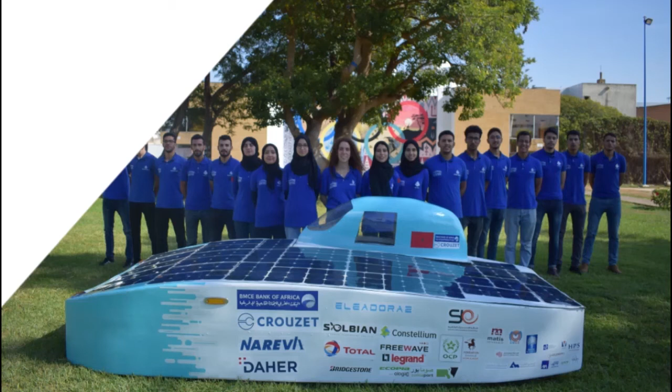Good day, everyone. We are the Rabat Solar Team, a group of 12 Moroccan engineering students from the National School of Mines of Rabat, whose mission is to promote solar energy by making eco-friendly solar-powered cars and honorably represent Morocco in the most prestigious competitions in the world, such as the Moroccan Solar Race Challenge in Morocco and the United Solar Challenge in Egypt. Ever since its creation in 2014, our team managed to design and build 4 solar-powered cars: Eleadora 2, the one in the picture, which is our latest invention and whose name means a gift from the sun, had seen the light in 2019.

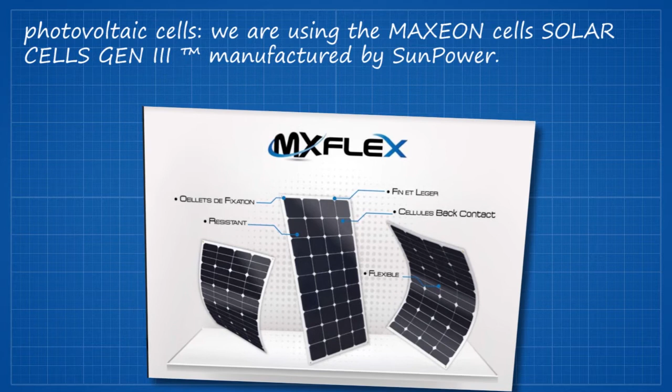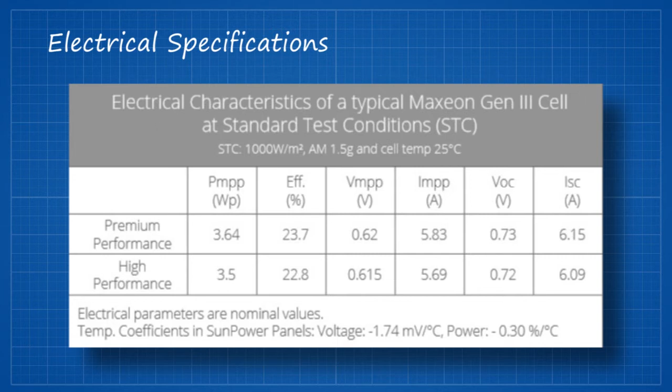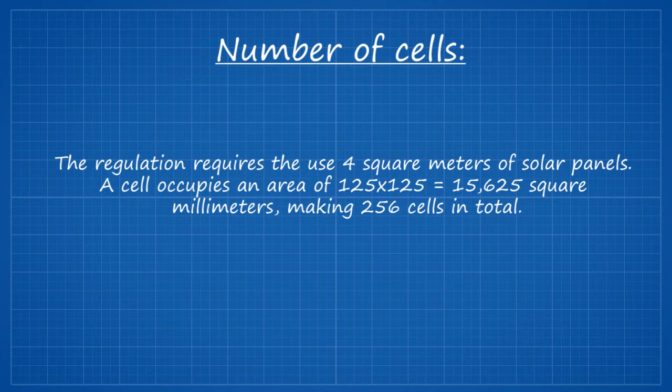Regarding our solar panels, we are using SunPower's third generation Maxeon solar cells owing to their strength, durability, and efficiency. The following figure is a technical drawing of Eleadora 2's solar cells. The electrical characteristic and main reason of our choice could be summarized in the next table, which is primary efficiency. Our car was constructed following specific international competition regulations, which require, for example, approximately 4 square meters of solar panels, and each cell occupies 15,625 square millimeters, a total of 256 cells. The solar panels in our Eleadora 2 are placed as follows.

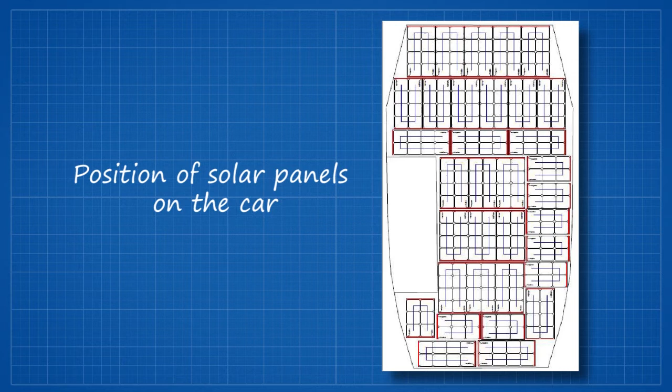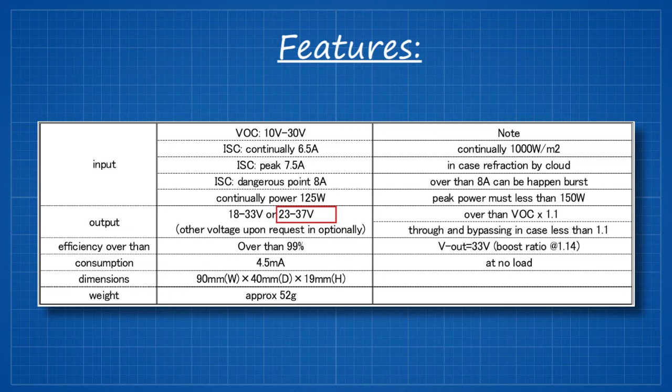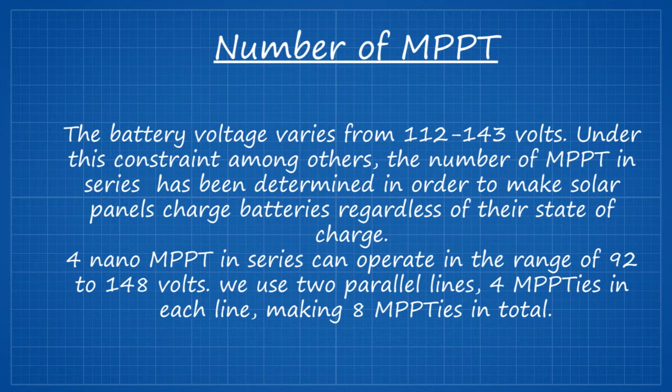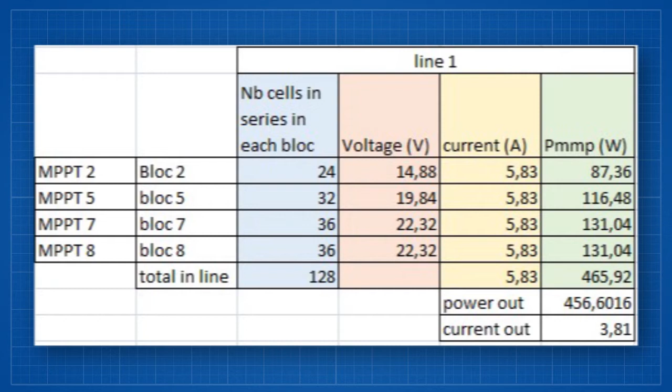Moving to our power tracking technique, we are using the MPPT Nano manufactured by Nomura Giken, type output 23-37 volts, which is specially dedicated to solar race cars. And since the battery voltage varies, we wanted to choose the number of MPPTs in series in order to make the solar panels charge our batteries regardless of their charge state. So we used 4 in series in each line, and since we got 2 lines in parallel, that makes 8 MPPTs in total. The table sums up the entire wiring system for both lines. It shows which block is linked to which MPPT in which line and all the other information on the number of cells in each block.

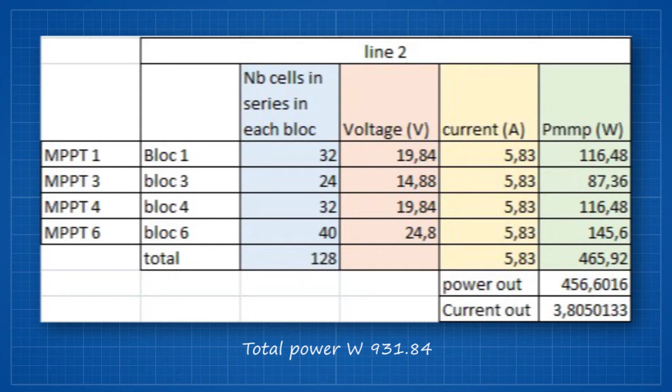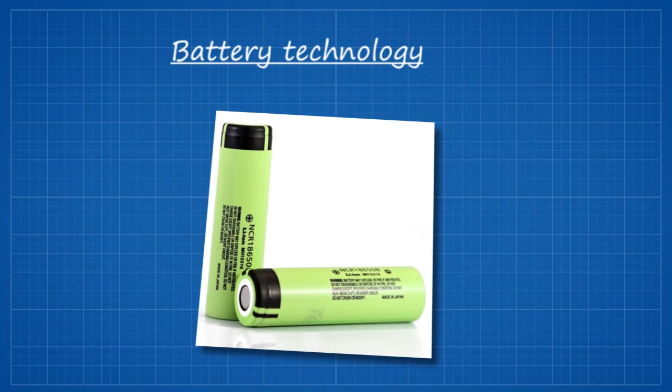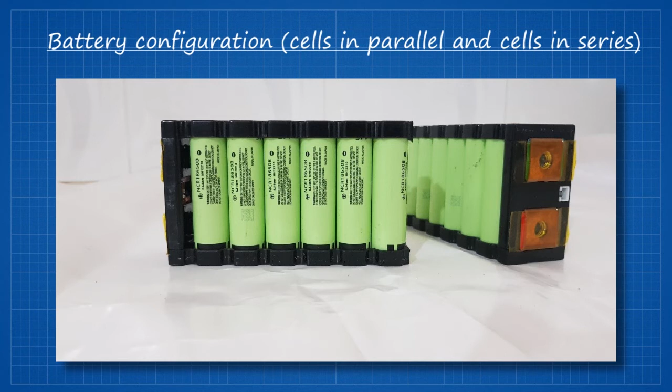Our energy storage system was also designed to respond to the competition rules, which require the installation of a safety system in case of failure and also fix the weights of the battery cells and many more. Here's an extract from the technical regulations that determines the total allowable cells mass in kilograms. As mentioned before, the weight is one of the biggest challenges, so we opted for a technology that offers a maximum gravimetric energy density, that lasts long and that provides a higher voltage. It is the lithium-ion batteries. The weight is determined in our case for 20 kg. However, its main disadvantage is the need for a proper management system to guarantee safety, otherwise the unmanaged cells can catch fire and explode. And here steps in the battery management system.

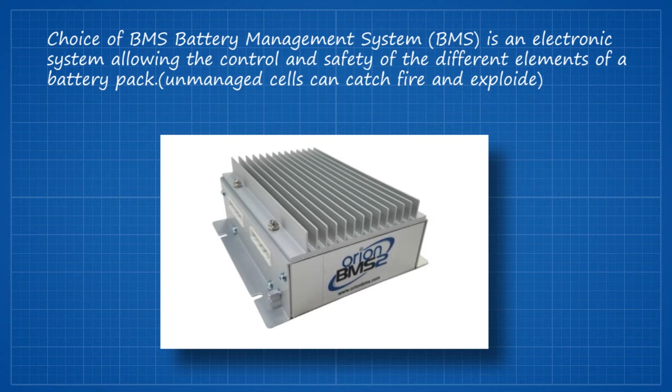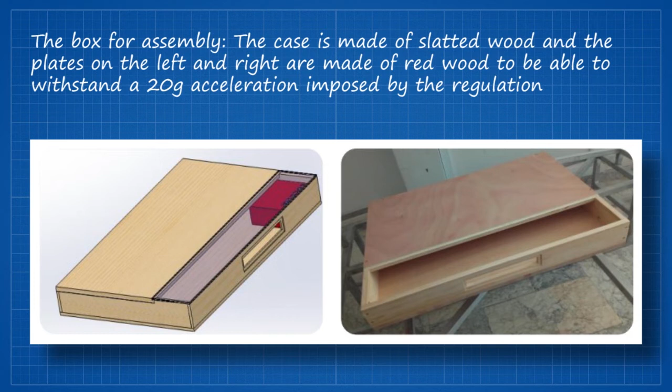Taking into consideration performance, capacity, protection, and ability to manage the high power circuits based on the battery need, we are using the Orion BMS 2 size 36. The box for assembly is made of slatted wood and the plates on the left and right are made of red wood to be able to withstand 20 g acceleration. And here is Eleadora 2's main circuit, and this is our battery pack.

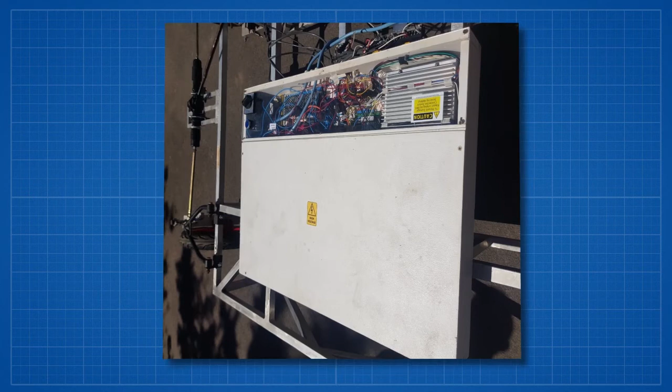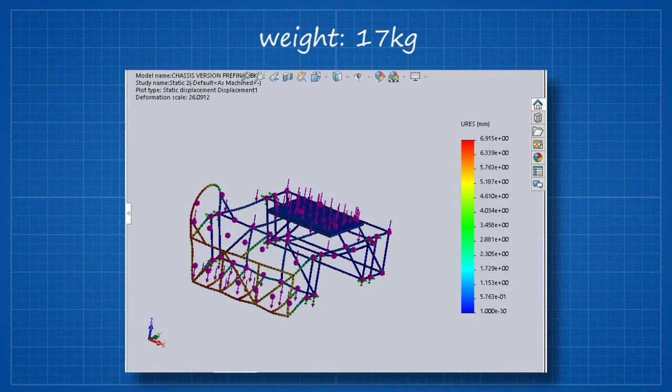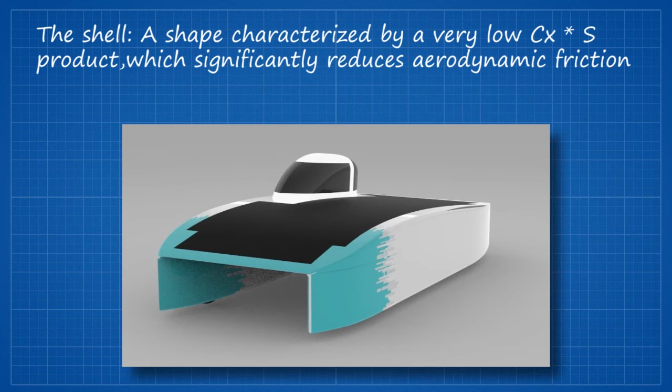Moving on to our mechanical aspects, our car's chassis was designed in order to minimize the energy consumed due to mechanical friction. So we built it using 6061 aluminum, which is characterized by its rigidity and its low density. Its weight is 17 kg. Our suspension system is made entirely of aluminum 7075 so that we could benefit from its lightweight characteristic. And last but not least, the shell, which is often mistaken for a ship's shell, was designed to significantly reduce the aerodynamic friction, and was made of carbon fibers to keep it as light as possible and of course as safe as possible from the regulations view.

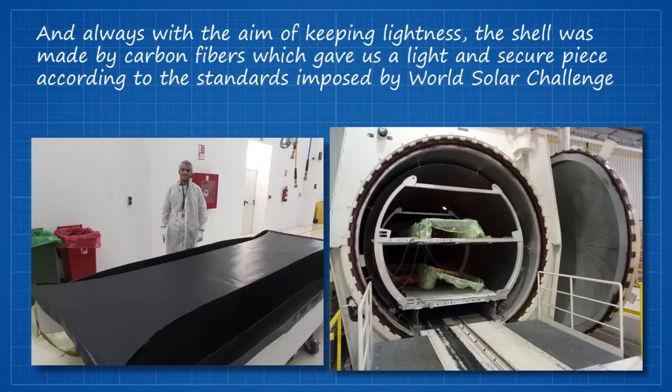One of the main keys to win a race is to establish a good strategy. So, our strategist's main mission is to analyze the speed of the solar car so that it could reach the finish line as soon as possible within the limits of the battery, and actually give the driver the areas in which he could speed and others where he should slow down. The dashboard is important for the drivers as well, as it controls the panel of the solar car. It provides the driver with the necessary data on the speed, the power, the current, etc. The following sheet highlights the importance of optimizing the design in terms of the car speed and time saving.

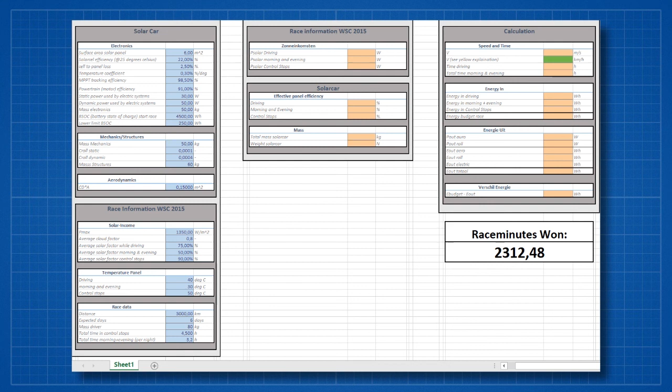As for the telemetry, we are using ZoomLink, which is an embedded system used in military applications due to its 10-mile range. Thank you.